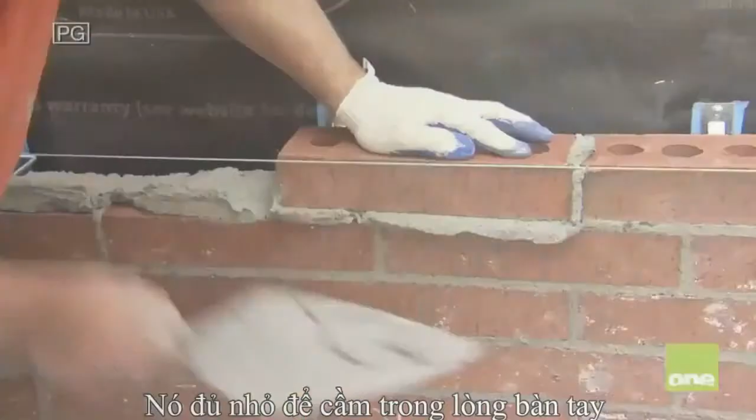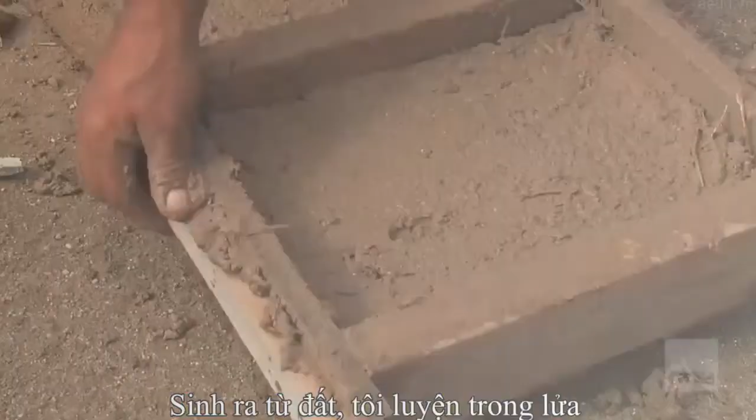Brick. It is history's first man-made building material. It's small enough to hold in your hand, but bind hundreds, thousands, or millions of them together, and these tiny blocks can capture the imagination and help build our future. Yet how this simple material is bonded together can make the difference between triumph and tragedy. From the engineering innovation behind some of our first architectural achievements to an aesthetic for the modern world, born from earth, baptized by fire. Today, new technology is adapting brick to meet the challenges of our civilization. Now, go inside the science of brick.

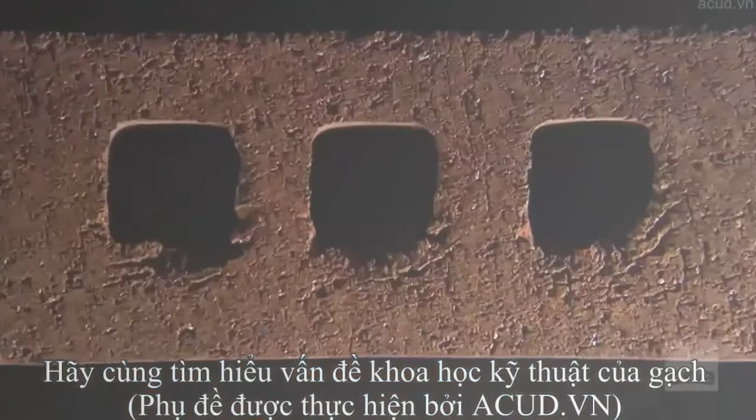It starts off as a simple block of clay. When put into fire, it turns hard like rock. This transformation has made brick a cornerstone of engineering for more than 9,000 years.

Brick is virtually everywhere. No other building material is so central to our history. It gives rise to some of the most famous structures from antiquity, many of which still stand in defiance of time.

It's mind-boggling in one respect because it's hard to realize that something can last that long. When we pick up a brick and we think of how to use it in a modern building, it is automatically linked to the history of brick architecture and the history of city making.

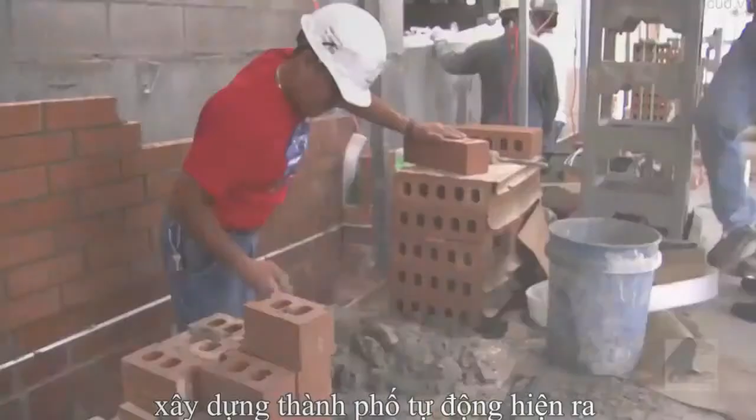Today, brick continues to meet crucial engineering needs, from the strength for everyday structures, driveways, chimneys, homes, to the exterior skin of stadiums and skyscrapers.

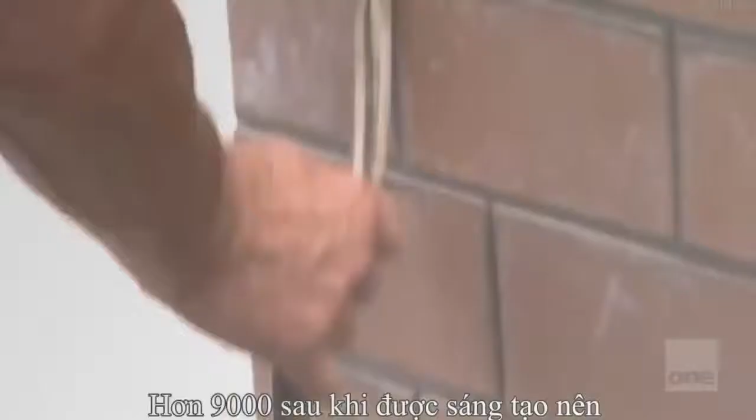More than 9,000 years after its creation, brick remains an essential material in construction. I mean, it's an incredible material, brick, and I never cease being fascinated by it. I never cease being amazed at what is done with it.

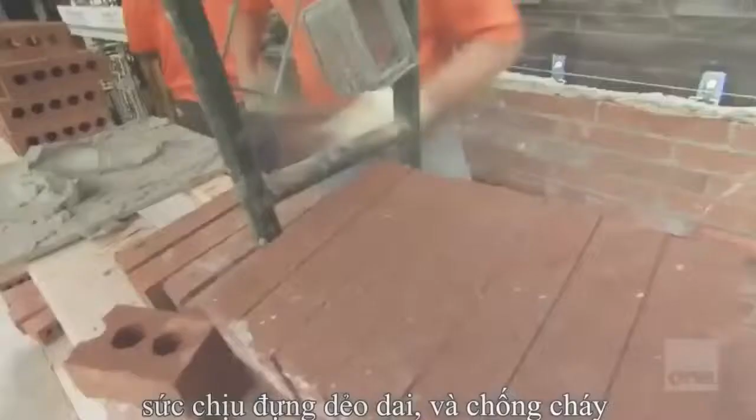Strong, resistant to the elements, virtually fireproof. Brick is prized for its attributes. But brick construction also has a central weakness: mortar.

Brick walls need an adhesive agent to bind the blocks together. Without mortar, a wall is nothing more than a collection of bricks stacked precariously on top of each other.

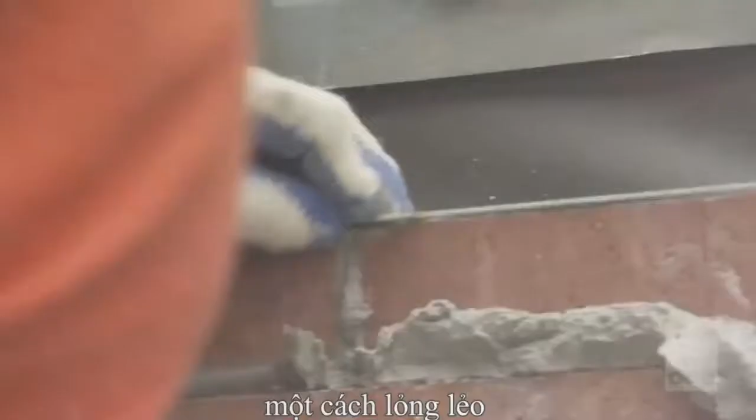Brick and mortar go together like bread and butter. You need mortar to lay bricks in because it's difficult to lay them dry and they've no ability to stick together. So one uses mortar, which is sand and cement or sand and lime, an adhesive almost, to keep the masonry units together.

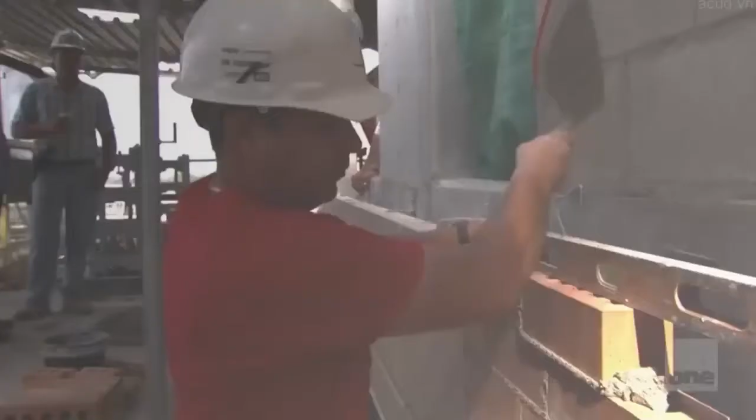Mortar is the glue that holds bricks together, but it is also brick construction's greatest weakness. When brick structures encounter a strong force from the side, the mortar goes under stress. It can begin to crack. The bond with the brick can fail.

Nowhere is this weakness more evident than in an earthquake. The swaying of the earth can cause mortar joints to fail. The results can be tragic.

Many of the brick buildings built here in the United States are not reinforced or designed to sustain seismic or earthquake loads. They don't like to be shaken around. They don't like to be moved. They don't like vibrations so much.

It's not a matter of if, but it is when. If it's a major earthquake, most engineers and architects agree that some buildings will fail in some manner.

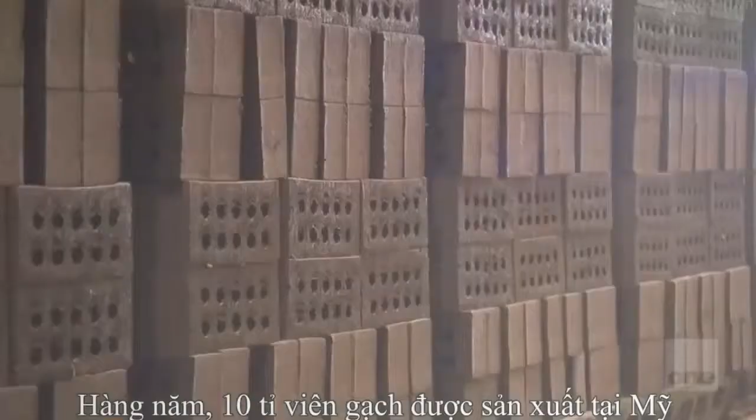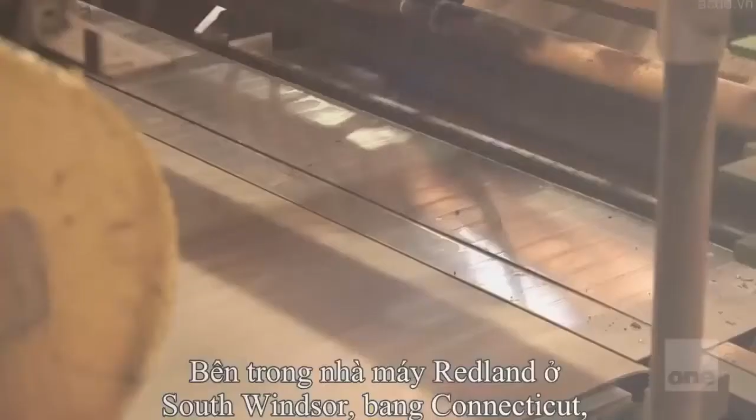Even with this inherent weakness, the demand for this ancient building block continues to grow. Each year, 10 billion bricks are produced in the United States alone. To meet the massive demand, most production is done in state-of-the-art factories. Inside plants like Redland Brick in South Windsor, Connecticut, nearly 50,000 bricks are produced each hour.

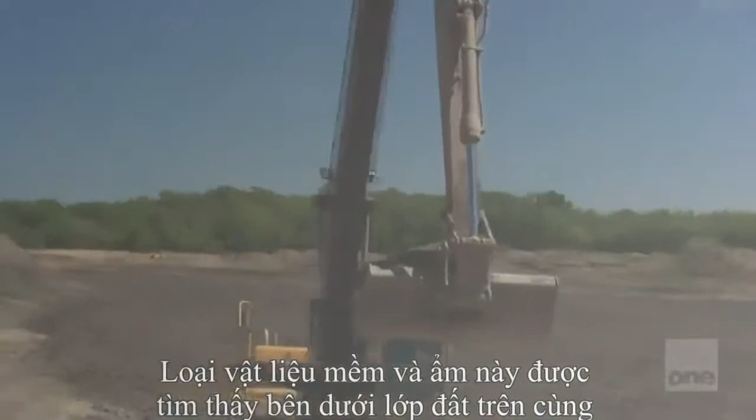While technology now drives production, the basic ingredient for creating brick has been the same for centuries: clay. Clay is the soft, wet earth generally found under the first level of topsoil. It is available in virtually every corner of the world. Clay is the same material that gives shape to pottery. But that does not mean all bricks are the same.

Select different clays that contain certain minerals, and bricks can be customized for specific traits of color, weight, or strength. The possibilities are vast.

Looking for a material that can insulate a furnace? Mine a clay that has alumina and silica for maximum resistance to heat. Need a strong material for an industrial factory floor? Select a clay with aluminosilicates for compressive strength.

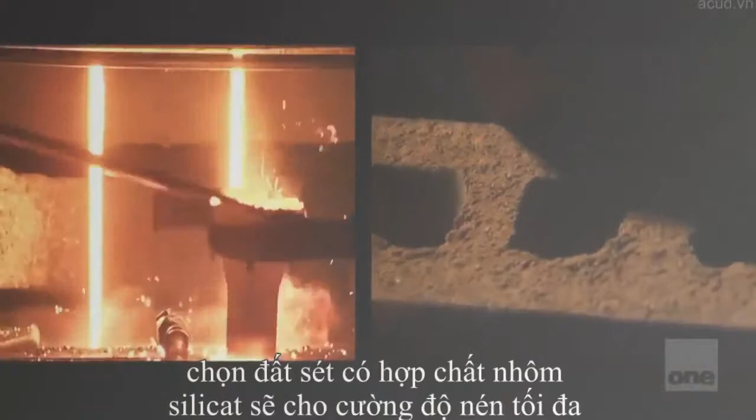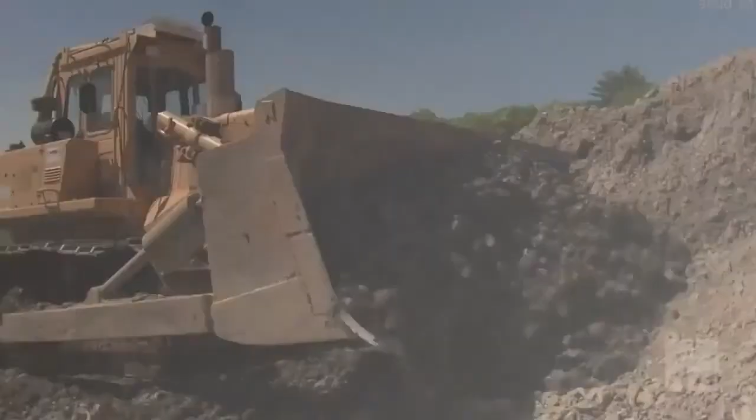Picking the right clay is a crucial step in brickmaking. Once mined from the earth, clay must be formed. For centuries, humans meticulously created bricks by hand. Today, machines called extruders shape clay.

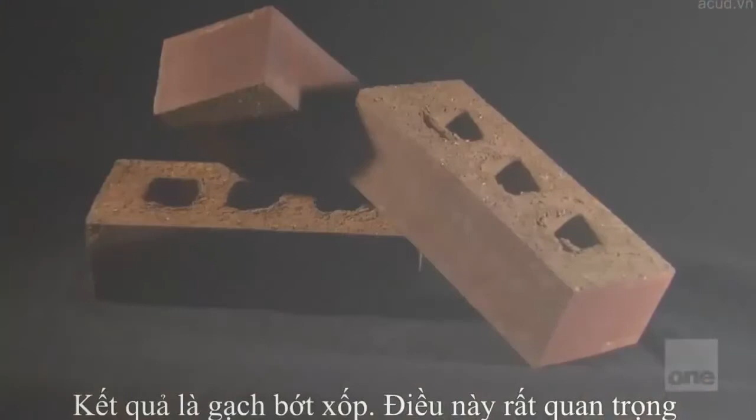As it's formed, tiny air pockets are pressed out. The result is a block that is less porous. This is crucial. In that process of actually squeezing that clay out, they actually take the air out of the brick, and that takes out the voids and makes the brick stronger and more water resistant.

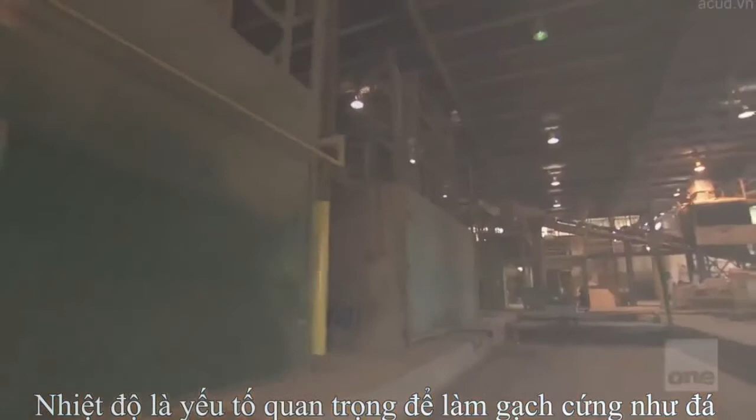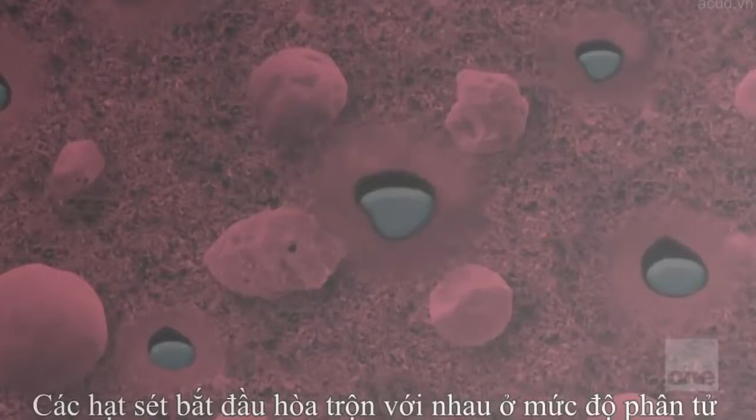But to convert clay into brick, it must be fired. Heat is the crucial element that makes it rock hard. Inside these modern kilns, bricks bake at temperatures of at least 1,600 degrees Fahrenheit. At this heat, a transformation takes place. The moisture content inside evaporates. Clay particles start to fuse on the molecular level. This bonding of particles is called vitrification. It turns soft earth into the solid, rock-hard essential building tool we call brick.

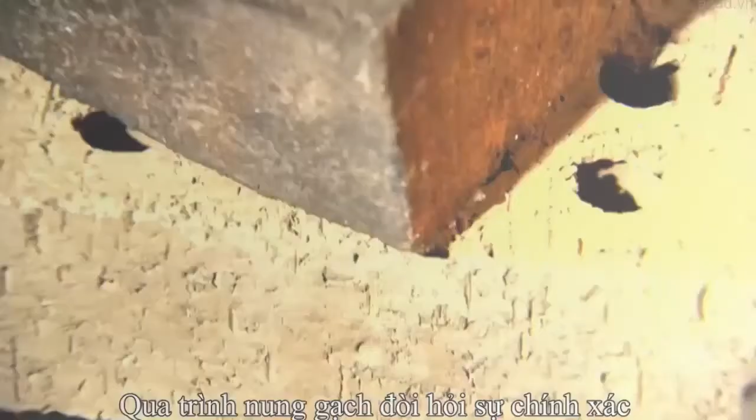Firing bricks requires precision. Bake them too hot or for too long, and the clay literally melts. Not hot enough or not long enough, and you've got a fragile, brittle block. Useless. Modern kilns monitor each variation in temperature. This attention to quality ensures that each brick will be strong, durable, and aesthetically pleasing.

Now, go back inside the science of brick. The Great Wall of China. It stretches nearly 4,000 miles. It cuts a path through the heart of a nation. And the strength behind much of this structure, an estimated 3 billion bricks.

But this epic barrier almost didn't stand at all. Centuries after it is first built, the wall begins to crumble to the ground. The mud bricks that give it strength are no match for the elements. The edges of the brick would slowly disintegrate, and then the whole thing would basically turn back into mud and go back into the earth where it came from.

To build a new wall, China needs a stronger brick. They turn to a new material, clay. Less porous than mud, clay bricks are more resistant to penetration by moisture. But sun-dried clay will not be enough. They turn to a crucial element, fire. For at least 3,000 years, the Chinese made pottery by firing it at high temperatures in kilns. They decide to employ the same technology to create brick.

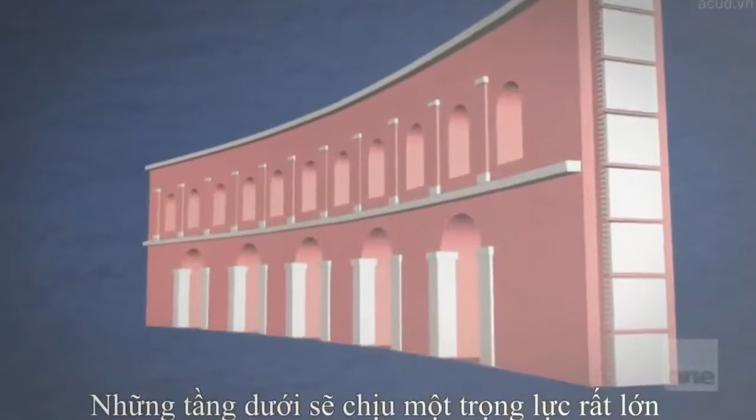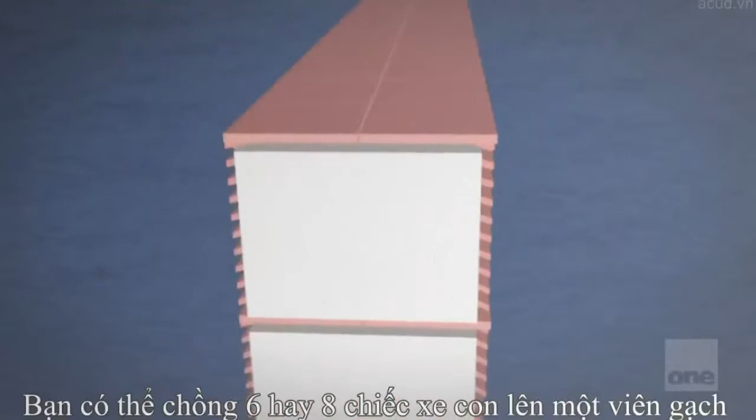The design for the market calls for a 6-story complex. This means the lower floors will bear incredible weight. In the ancient world, brick is the ideal material to support such mass. The brick strength is tremendous. You could stack brick 100, 200 feet tall. It will sustain the weight of itself. You could stack 6 or 8 cars on top of a single brick.

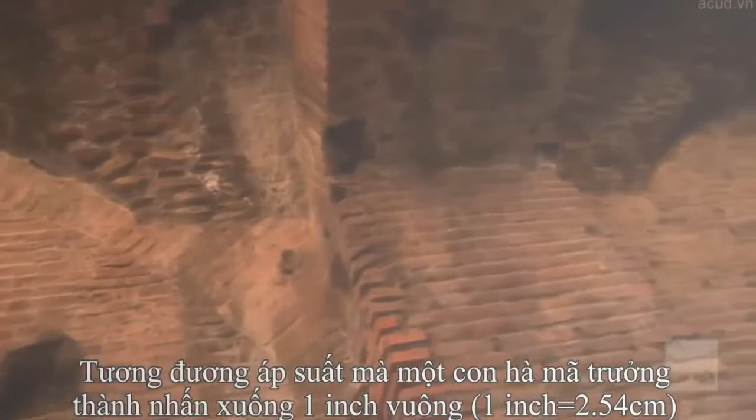It will not crush. The average Roman brick can sustain approximately 5,000 pounds of pressure per square inch. That's the equivalent of a hippopotamus pressing down on every single inch of it at once. Even modern concrete is only required to support 2,000 to 4,000 pounds per square inch.

To further increase the brick's ability to sustain the load, the Romans turned to another architectural innovation: the arch. When we think of the Romans and how they contributed to brick construction, the first thing that comes to mind is the arch. The arch is essentially a very perfect compression element. It's a very clever way to force masonry to work in compression only.

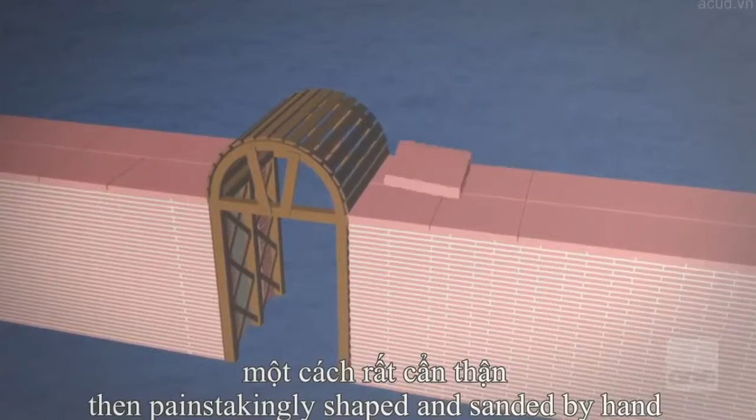To create these arches, bricks are carved into wedges, then painstakingly shaped and sanded by hand to precise measurements in order to fit securely. Nearly 2,000 years later, you can still hardly fit a playing card between the bricks. But the greatest innovation in Trajan's Market is a secret inside the walls.

Roman bricks are not the same blocks used by the Chinese. Long and square, they resemble thick tile more than anything else. By cutting these bricks like a pizza into halves, quarters, or even eighths, Romans create a formula for incredibly stable walls. The outside of the wall is straight and flat, but this is just a facade. Behind it is another material that gives it even greater strength: concrete.

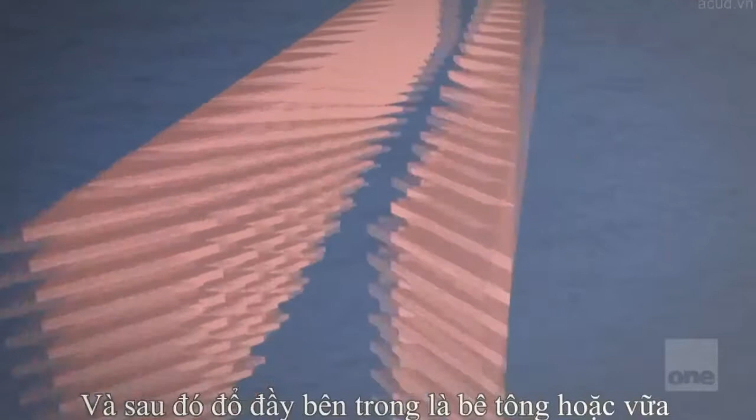They'd use this face brick, arches and stacked brick, and then they would fill the inside of the walls with concrete or grout. The jagged, sharp edges of the brick triangles bond perfectly with the concrete. So each little bit of concrete had a place to put his thumb and forefinger, so it gave it a mechanical retention as well as just an adhesive retention.

It's just good engineering. What this did, in essence, is create a composite wall, brick and concrete, and they gained more strength still. Brick's compressive strength combined with the use of concrete allows Trajan's Market to become an ancient high-rise. Now, go back inside the science of brick.

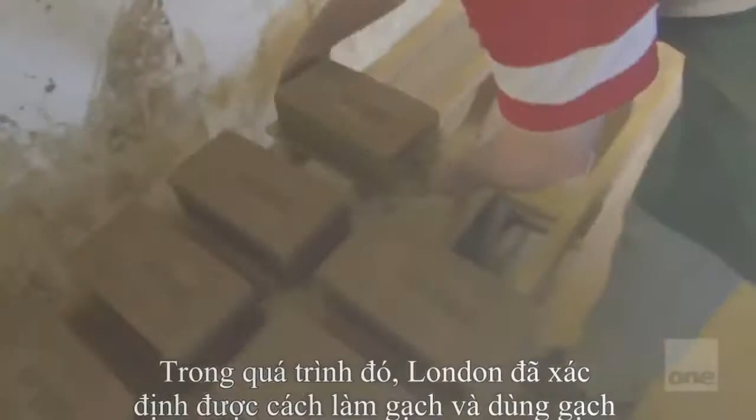London, England. This legendary city turns to brick to overcome one of the greatest disasters in its history. In the process, London redefines how this material will be made and used. September 2nd, 1666. Flames engulf London. Over 3 days, the losses are staggering. 13,000 houses, 87 churches, and countless businesses. The city lies in ashes.

As Londoners clean up the wreckage, they notice something amazing. The flames that rage through the city stop right here. This is part of the ancient city wall. It is made of brick, and it is entirely unharmed by the flames. In fact, seemingly every time the fire reaches a brick wall, it stops in its tracks. The reason? Brick is fireproof.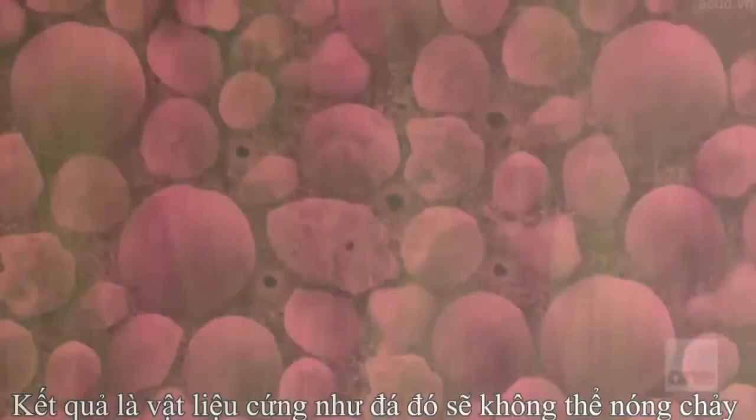When clay is fired in a kiln, the particles inside fuse together into a new molecular structure. The result is a rock-hard substance that will not melt unless it is pushed to more than 2,000 degrees. In essence, brick is virtually immune to typical fires. It's already been fired in a furnace for days before you ever get to use it.

So its properties were actually gained by its thermal sintering of the components together. And so you come along and heat it back up to the kind of temperatures of a kiln, which would not be uncommon in a fire. It sort of says, oh, back in the kiln.

In the wake of the London fire, Christopher Wren, the chief builder to the king, imposes new regulations on all reconstruction. Every new building must be made from fireproof materials. London turns to brick. People wanted to use fireproof products that could withstand any kind of catastrophe that would come around. But the city also needs to build quickly.

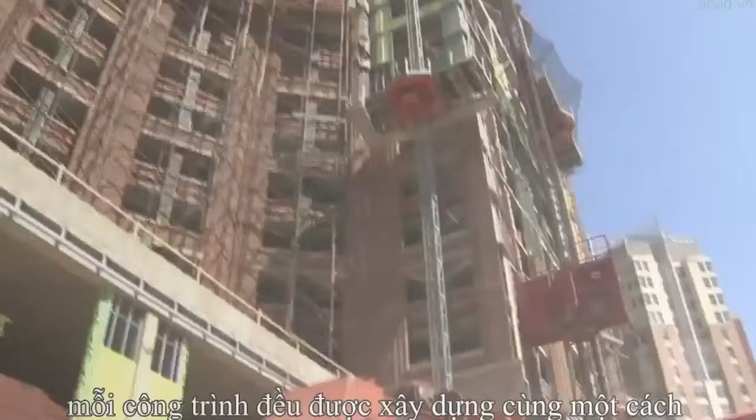Brick construction is incredibly time-consuming. From the earliest brick structures up to the modern day, each building has gone up the same way. Brick by brick, each one painstakingly laid by hand.

Typical square blocks make progress even slower. There's beauty in the shape of the brick, which comes from a supreme economy. Some of the early bricks would typically be square, but square brick isn't terribly efficient. London looks to a different shape of brick, rectangular. Able to fit in a human hand, these rectangular blocks permit masons to raise structures quickly and efficiently.

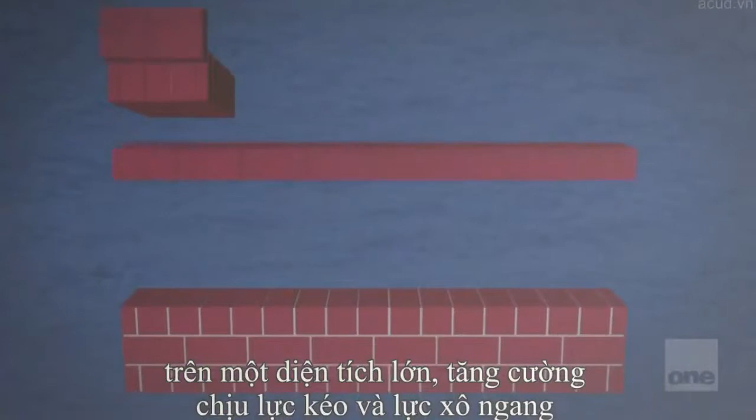This shape also brings an added benefit, strength. The rectangular shape allows one brick to lay directly across two bricks below it that are facing in another direction. This stacking system gives walls strong patterns that distribute weight over a larger area, increasing both compressive and lateral strength. From churches to hospitals to private homes, brick restores London to a great world capital.

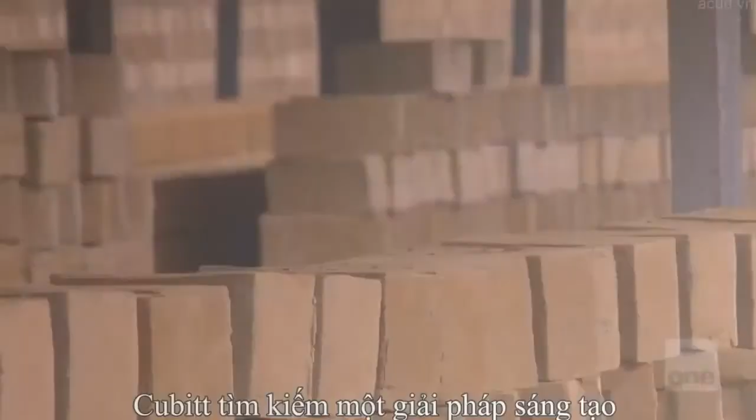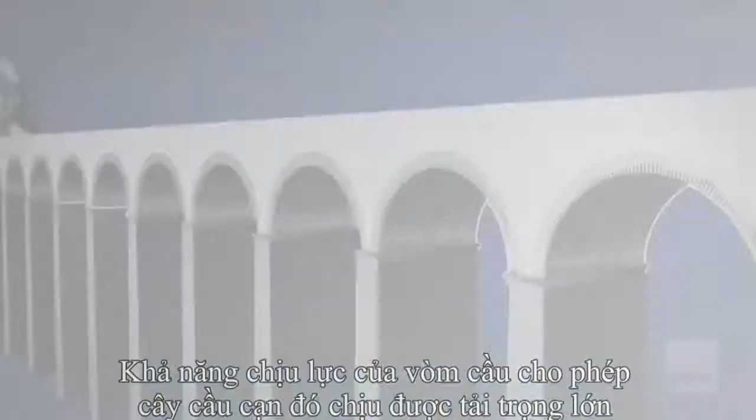England, mid-1840s. Renowned engineer William Cubitt sets out to run a rail line from London north to Edinburgh. In the way is an enormous obstacle, the Mimram Valley. Cubitt looks to an engineering masterpiece for inspiration. He elects to use 40 massive arches modeled directly after the Roman aqueducts to span the distance. The strength of the arches will permit the viaduct to carry great weight with fewer bricks for construction.

After just 2 years of construction, the viaduct opens in 1850. It quickly begins to buckle under the train traffic. As the use of brick developed and major cities wanted to use it for projects like viaducts and bridges, they discovered that brick has its weaknesses. They don't like to be shaken around. They don't like to be moved. They don't like vibrations so much. In essence, each train is like a mini earthquake, slowly shaking the bricks side to side, causing them to crack. Engineers need a new solution.

The answer lies in a completely different kind of brick, engineering or pressed brick. All bricks have tiny pores or air pockets that can act as weak spots when they encounter force. Engineering brick is made by mechanically pressing the clay to be less porous, increasing strength. Well, engineering bricks came about largely because of the railways, where there was a need for a brick with compressive strength. In 1930, engineering brick is used to reface the entire viaduct. More than 150 years after it's first erected, Digswell continues to provide safe passage between London and Edinburgh.

Now, go back inside the science of brick. It stretches half a city block. It stands nearly 200 feet tall and is composed of almost 600,000 bricks. The Monadnock Building in Chicago is a landmark in American architecture. When it opens in 1892, the Monadnock is hailed as a marvel of engineering. Today, it represents something very special in the history of brick, its downfall. The Monadnock is the last all-brick high-rise in the world.

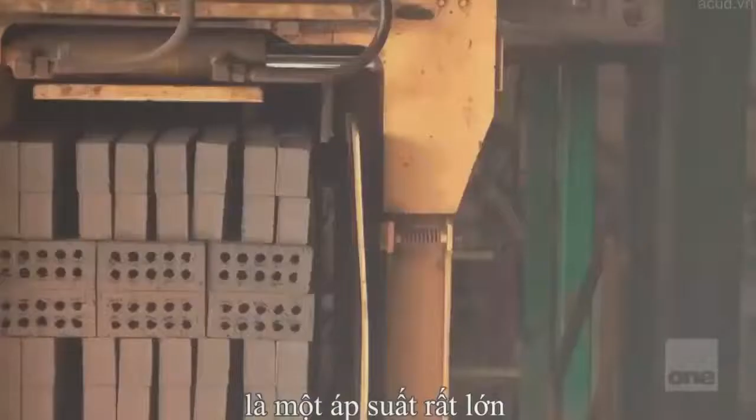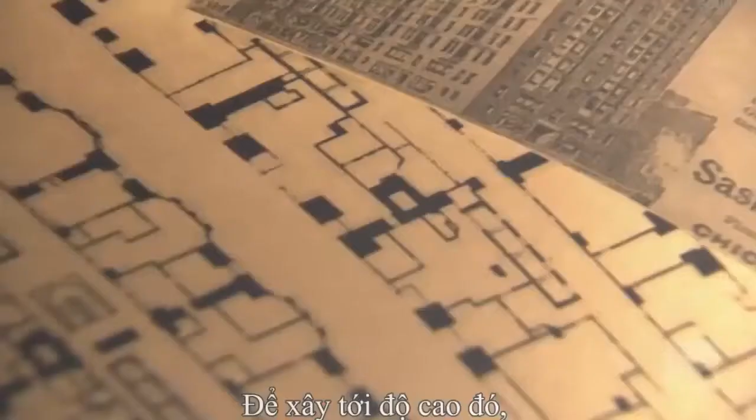1889. Architects Daniel Burnham and John Wellborn Root plan to build the tallest brick office building on the planet. The Monadnock will stretch 16 stories above the heart of Chicago. To erect a building to such heights, engineers need to conquer a crucial problem: brick's lack of lateral strength. When a brick wall encounters stress from the side, the mortar holding it together can fail. Some engineers at the time believed that any brick building over 10 stories will get knocked over in a strong wind. How will the Monadnock combat the legendary Chicago winds at 16 stories?

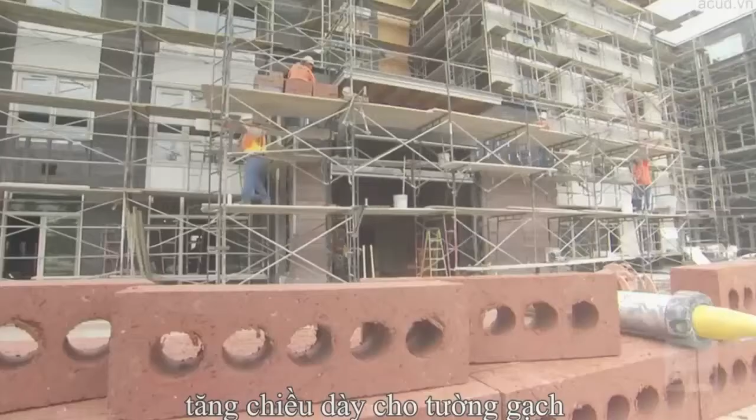The answer seems simple. Add thickness to the walls. Walls in an average brick building are usually 1 to 2 feet thick. For the Monadnock, engineers triple that to 6 feet thick on the ground floor. But the apparent solution creates a tremendous problem. The completed Monadnock weighs an estimated 50,000 tons. The building is so heavy, it begins to sink. The Monadnock is designed to showcase brick's potential for high-rise construction. Instead, it highlights the material's limitations.

Just 2 years after the Monadnock opens, an addition is made. Another massive building stretching half a city block. The new structure seems identical to the original, but beneath the brick is a secret: a steel frame.

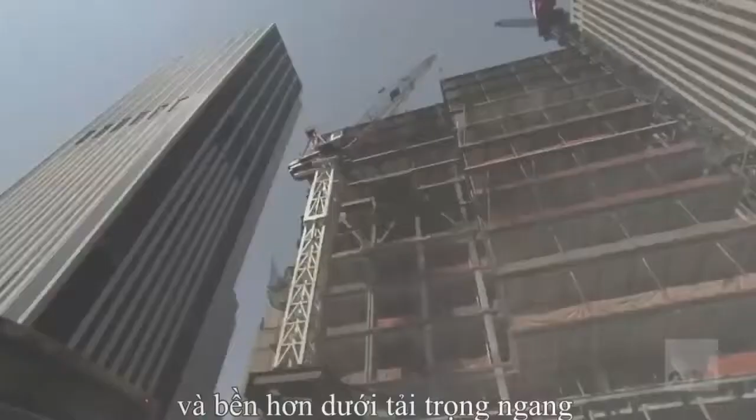In the 19th century, the mass production of steel emerges and changes the face of construction. Lightweight, flexible, and strong under lateral stress, steel is seemingly everything brick isn't. Steel permits the frame of the addition to be much thinner and lighter than the walls of the original.

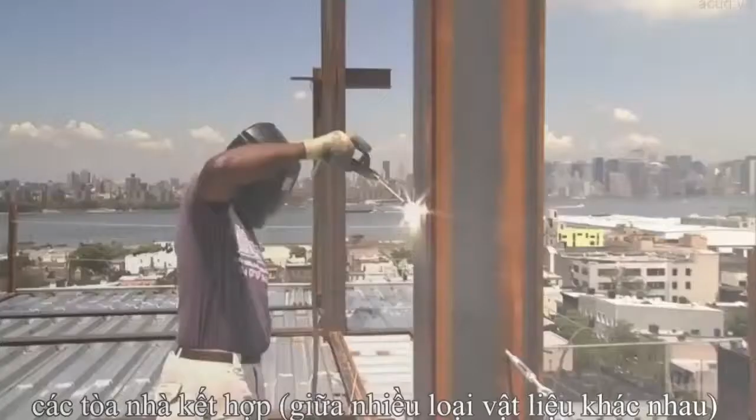The addition to the Monadnock represents a new chapter in brick construction: composite buildings. Steel gives architects a new tool to build higher, stronger, and faster. As buildings soar ever higher, brick takes on a new purpose: aesthetic beauty. It is really, really, really thick paint that lasts a long time. And because of its traditional look, there's a great many people who prefer the aesthetics of the brick.

The Chrysler Building, with its wonderful Art Deco top in New York, is clad in 3 million blue-glazed bricks. So brick ceases to be used as a structural material, but it retains great importance as a decorative cladding. Before, we used brick as the load-bearing element, and there was something covering it, and brick was the sort of utility part of it. Nowadays, though, brick is now the aesthetic part, and behind the brick is some type of steel or concrete frame, which is taking all the load.

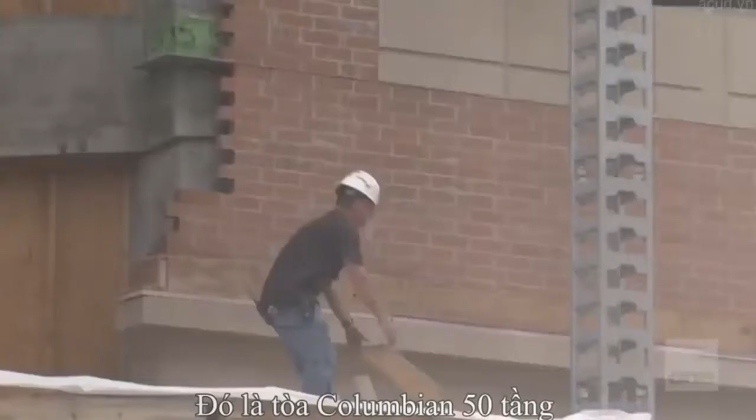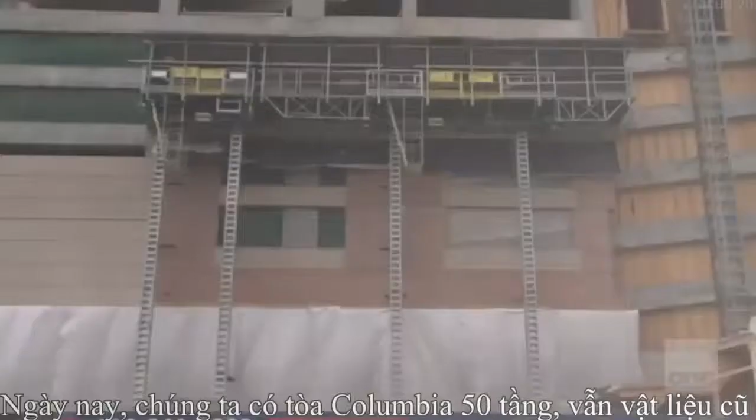Back in the turn of the century, when they were building the Monadnock building and other buildings like that, architects and builders were limited to how high they could build the masonry. Today, we've got the Columbian, it's 50 stories high. Same material, brick, on the outside. And while a lot of the construction has changed and a lot of the design aesthetic has changed over the years, brick absolutely has a timeless quality about it.

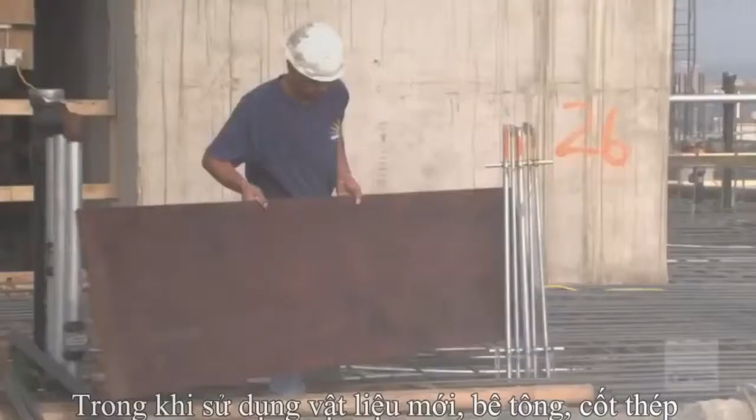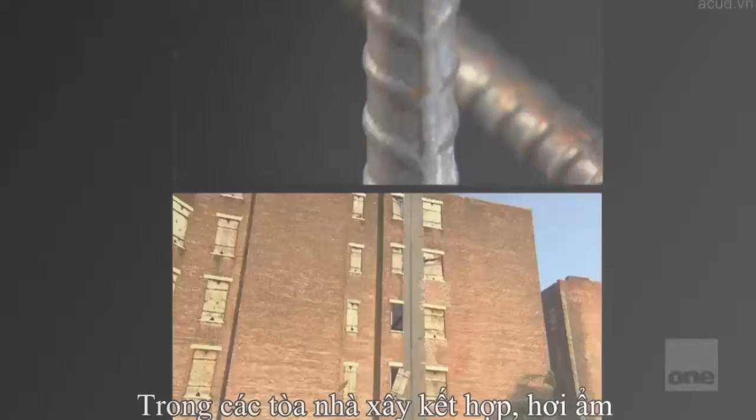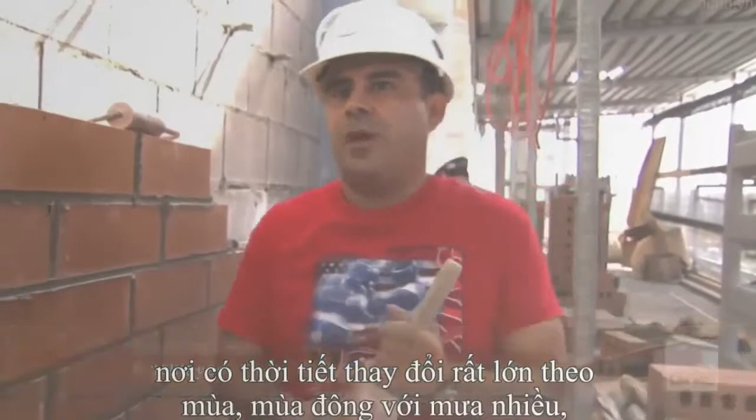While using the modern materials of steel and concrete allows engineers to build stronger and faster, modern composite buildings bring new challenges. In composite buildings, moisture can collect between the internal structural walls of concrete and steel and the brick exterior. The result can be corrosion and decay at the core of the building. Eliminating that moisture is crucial. We need a drainage system for these walls, considering that we're in the northern part of Illinois where the weather changes dramatically from winter to rain, and then we have the real hot summers and the fall and the moisture.

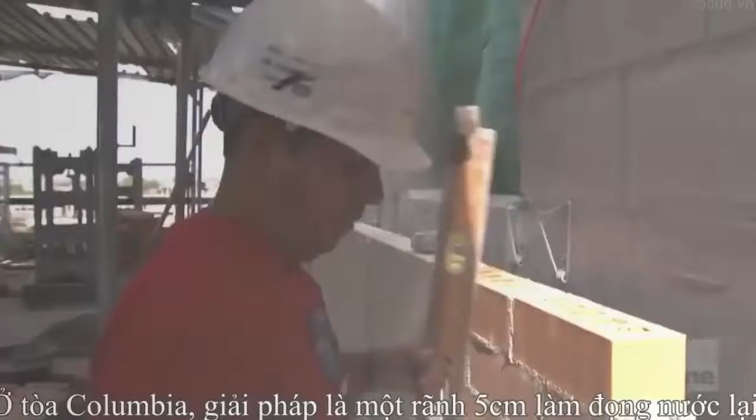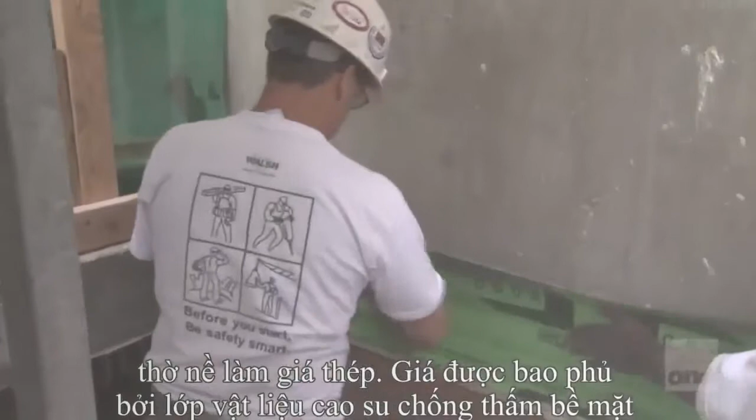In the Columbia, the solution is a 2-inch cavity wall that collects the water and drains it away from the building. The technique bricklayers use to make this happen is an intricate one. Before starting a row of bricks, the mason sets down a steel shelf that is covered with a rubberized waterproofing surface. He places a piece of rope in the mortar between bricks. This will act as the wick to carry the water away from the interior wall. The water will be safely carried outside the building, where it can't do any damage.

Composite buildings permit brick to soar higher than ever before. No longer bearing the structural load, it is the beauty of brick that allows it to survive in the world of modern construction. Now, go back inside the science of brick.

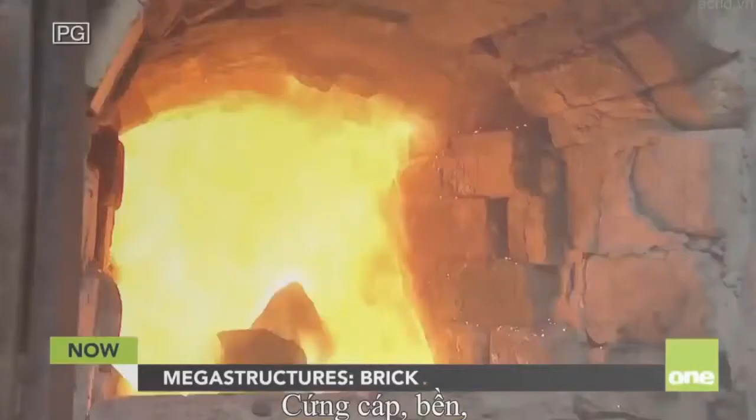Strong, durable, virtually fireproof. Bricks have been a cornerstone of engineering for nearly 10,000 years. But when brick construction goes bad, the results can be deadly. As brick construction ages, the mortar that binds the bricks together can wash away. Without regular maintenance, once solid brick walls can become death traps.

Today, they are on their way to inspect an aging and abandoned group of apartment buildings in Harlem, which are in danger of collapse. Harlem has some of the most beautiful housing stock in the city, much of it more than 100 years old and carefully restored. But some buildings have missed out on Harlem's recent boom. Today, the forensic team is evaluating the safety conditions of a group of apartment blocks built in the 1890s.

They have been abandoned by their owners and now belong to the city's Department of Housing, which must evaluate if the brick structures can be saved or must be torn down. You notice some bricks are missing. It's very deteriorated. When the forensic unit gets a call to go in to have a look at a building, we know that the structural deterioration is advanced. We've lost floors, we've had fires, partial wall collapses. So what we're going in to do is to evaluate to make sure that it's safe.

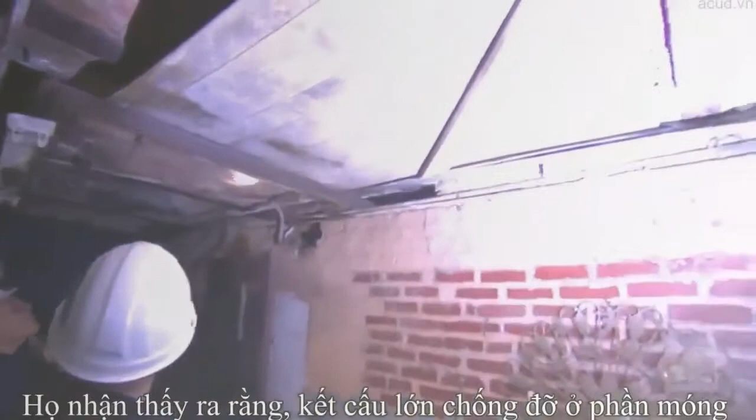The brick arches are in good condition. They discover that the huge structure is supported on a base of brick arches. How is the mortar here? It's okay. It's stable. It's drying. Amazingly, the 120-year-old masonry is holding firm. It is the steel-reinforced beams that show the most decay. No, the steel here is flaking on the... To do a complete rehab, these aging metal beams must be reinforced or replaced.

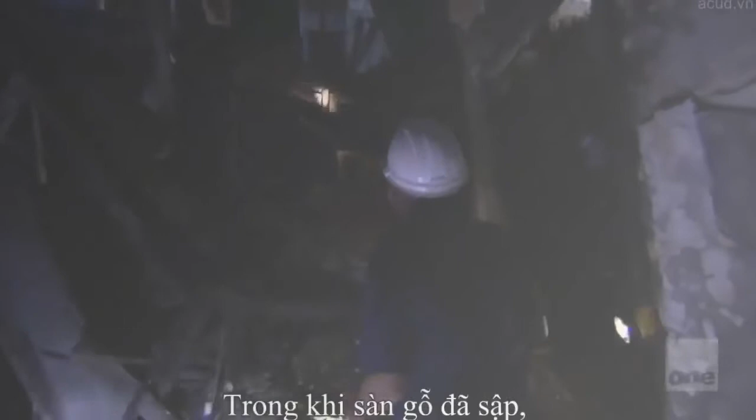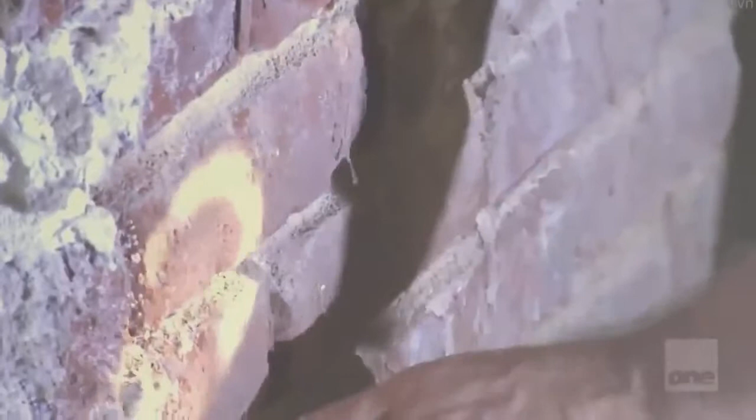Very careful, of course. Visiting the upper part of the building poses a special risk from ceiling collapse. Step. Any misstep here could be deadly. Second floor joists are collapsed in this area right above us. While the wooden interior floors have collapsed, the building's brick walls remain solid. And the wall seems pretty acceptable from the interior, but crucial mortar shows signs of decay. The mortar is just, you can remove it with a finger. To make this building habitable once again, these gaps must be repaired.

The team's evaluation today is that the buildings are a hazard, but their brick frames essentially sound. The final decision to restore or rebuild can now be made by city officials. I believe the buildings can be brought back relatively easily. It's commonly done. We have one right here behind us. We have the original version of the building which has been restored, and right beside it we have a 100-year-old neglected, abandoned 6-story walk-up.

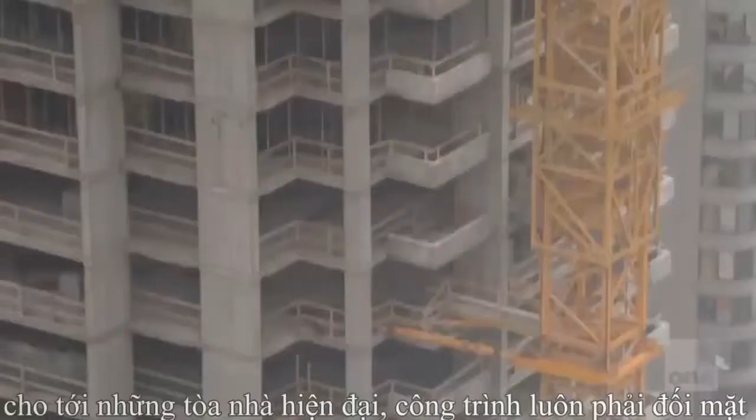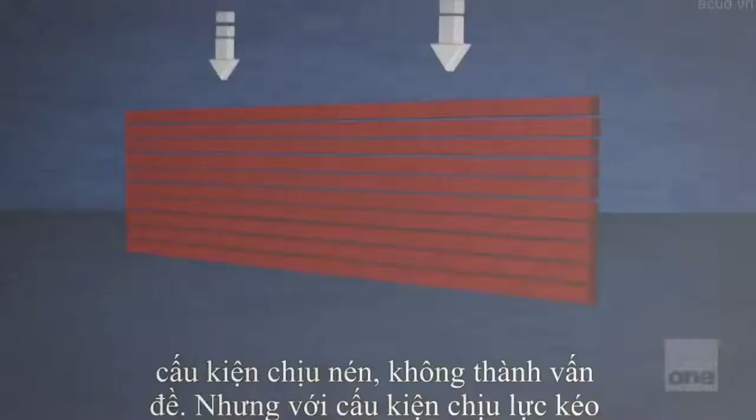But from the earliest brick construction up to modern buildings, these structures have all faced a lethal enemy. Earthquakes. When the earth starts to buckle, bricks' inability to move from side to side with the quake can bring them tumbling down. And when the ground shakes and a building tries to follow the ground, some parts of the building go into tension and some go into compression. The parts that go into compression, not a problem. But the parts that go into tension, really bad news. Now, go back inside the science of brick.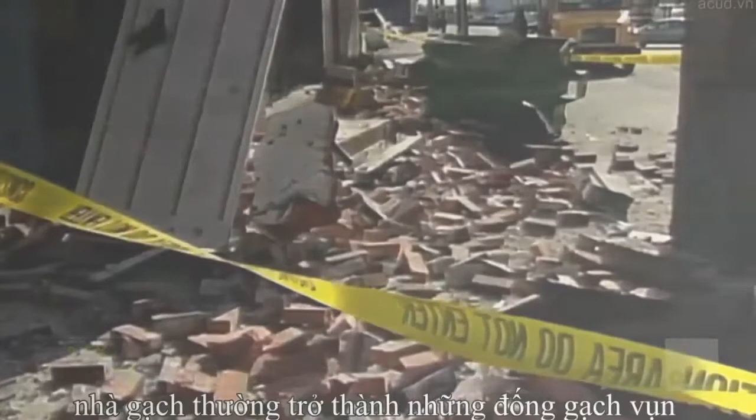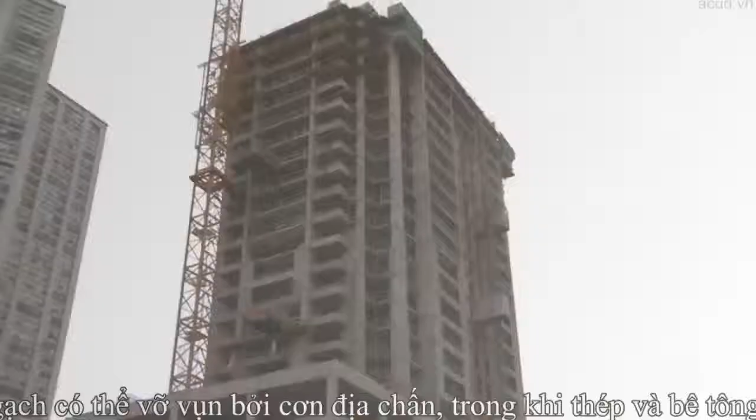From San Francisco to Los Angeles, to Iran, to the Philippines, the picture repeats itself. In the aftermath of a seismic event, brick buildings are often reduced to piles of rubble. A primary victim of earthquakes are buildings with traditional brick construction. With no steel or other reinforcement, their structural stability can fail with a strong enough force. And even in modern composite buildings, bricks can crumble in an earthquake. While steel and concrete keep the core of the structure intact, the brick facing falls away.

The reason for the failure is simple: mortar. Mortar is brick's Achilles heel. When a brick wall encounters a violent lateral force, the mortar holding the bricks together starts to crack. If the force is strong enough, the mortar separates from the brick and the wall comes apart. Not only will you see piles of brick on the ground after an earthquake in news footage, but you'll see half the bricks look like they could be sold in the garden store tomorrow. There's not even any mortar sticking to them. They're just bare bricks sitting there. For decades, engineers have been seeking to solve the weakness of mortar joints.

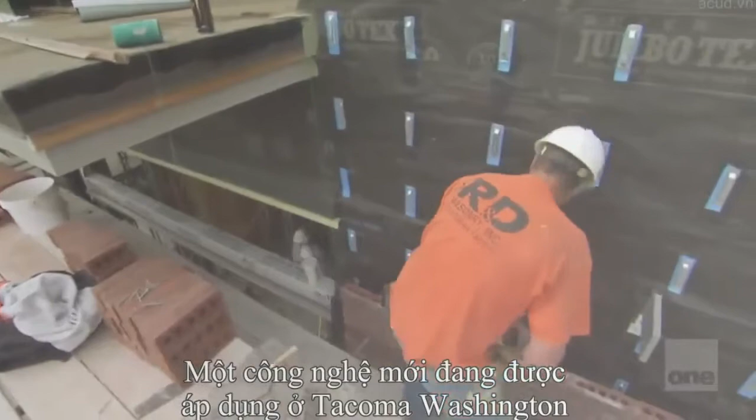A new technology is currently being employed in Tacoma, Washington. When completed, this 6-story building will provide apartments to faculty and students at the University of Washington. Erected with a central core of steel and concrete, the building will be faced with more than 10,000 bricks.

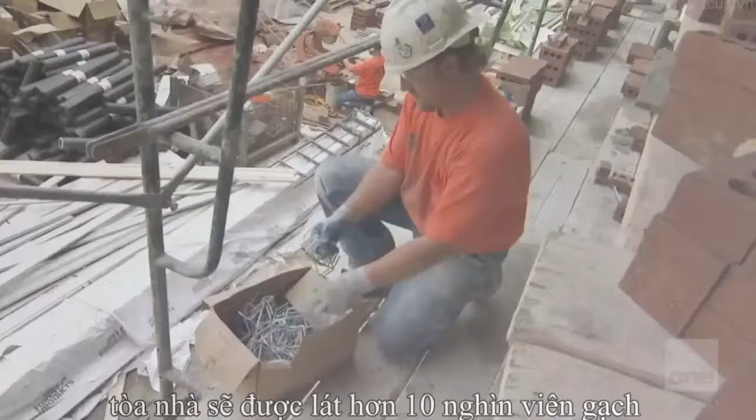To secure them to the building, engineers are using a new invention: the seismic tie. Made of steel, the ties literally attach the bricks to the interior concrete and steel structure of the building.

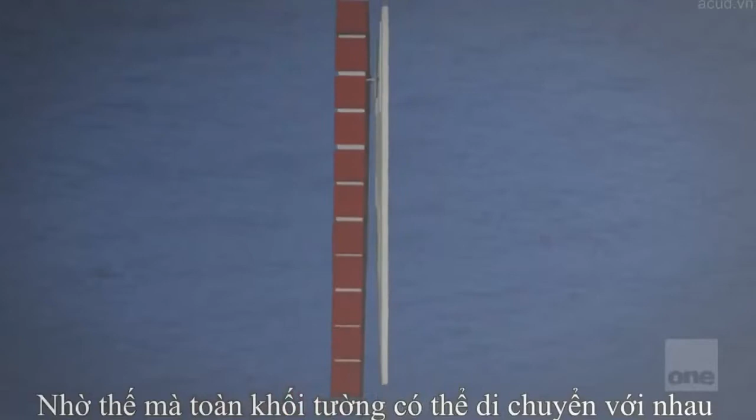The ties we're using are attached like this, and then the 9-gauge wire nestles into it, which allows the building to move different from the masonry. The masonry can shift up and down this much compared to the backup of the building and still be attached to the building. The ties permit the brick walls to move independently of the primary building during a seismic event, but still remain attached. Thus, the mortar and bricks are able to move in unison, eliminating the tension that causes them to break under force.

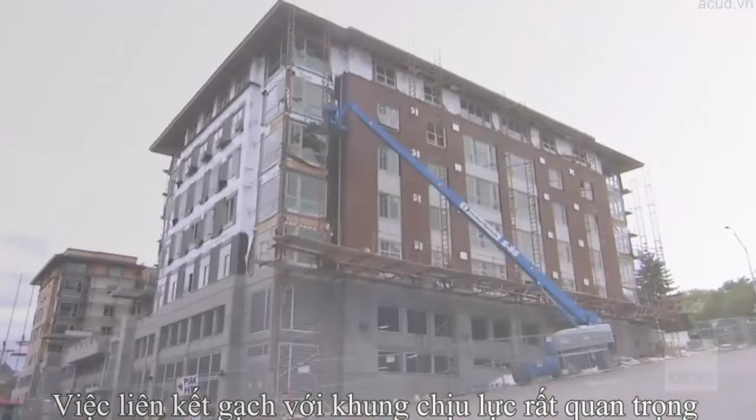Securing the brick to the structure of this building is crucial. Tacoma and nearby Seattle sit directly on a fault line. February 28, 2001, 10:54 a.m. The Seattle region experiences a shock registering a magnitude of 6.8.

Many of Seattle's landmark brick structures suffer severe damage. Brick mason Jim Reynolds is working on a construction site when the quake hits, but it's one equipped with seismic ties. The new buildings we were working on had masonry veneer. Because of the seismic attachment, the brick just undulated with the wave-like motion of the earthquake.

The seismic tie has great potential for new construction. But what about existing brick structures? There are countless brick buildings in earthquake zones all across the country. But if reinforcement isn't done, many of these buildings are little more than sitting ducks. If we fool around with structures that we know are seismic liabilities and wait long enough, nature will take care of the problem for us.

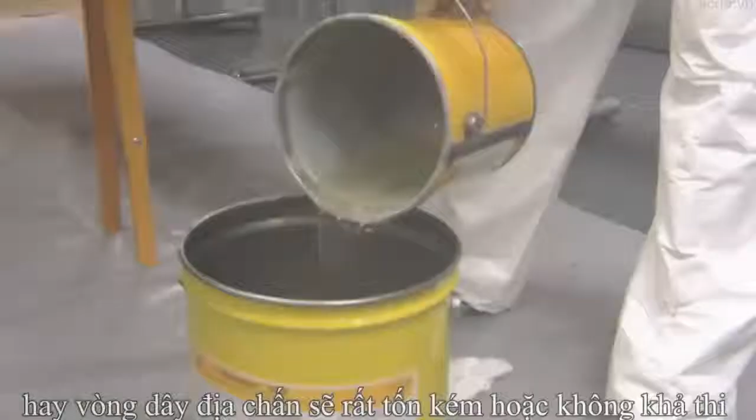In many instances, adding steel or concrete or installing seismic ties is costly or impossible. But a new technology is attempting to solve the problem by reinforcing brick from the outside. It's a space-age fiberglass fabric with 5 times the strength of steel.

This fabric can permanently bond to brick with a special epoxy. The fabric is designed to help a brick wall survive the force of an earthquake. You're combining the positive attributes of a brick wall, which are very good in compression, with the positive attributes of the composites, which are very good in tension.

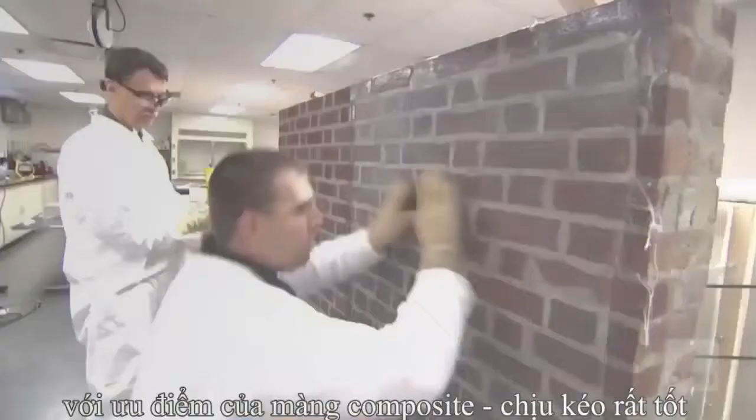A properly adhered and bound building won't drop its brick on bystanders in a seismic event. You still preserve the brick. The epoxy reinforcement is very strong.

In this test, the sledgehammer simulates the same type of violent force a brick wall encounters in an earthquake. When the sledgehammer strikes the side of the wall that has not been treated with the fabric, it crumbles. Strike after strike, the mortar and bricks fail. Brick by brick, the wall collapses.

On the side of the wall treated with the fabric, the results are incredibly different. With each strike, the fabric disperses the force. The bricks and mortar are held securely in place. This fabric has incredible potential. It could provide greater support and safety for countless unreinforced brick buildings around the world.

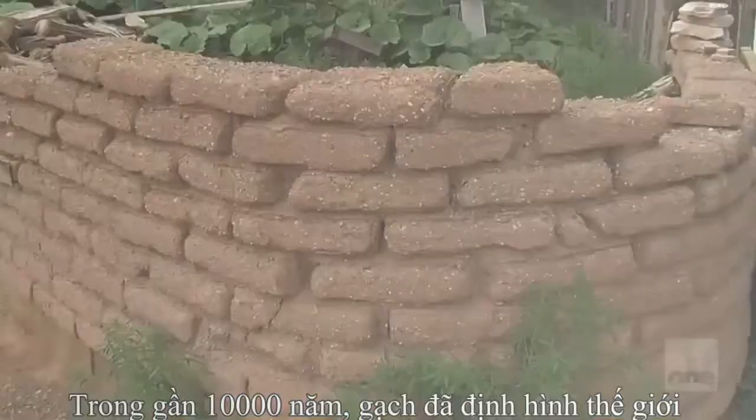For nearly 10,000 years, brick has given shape to our world. From simple blocks of mud, to composite buildings, to space-age technology, human ingenuity continues to reinvent brick, keeping this ancient creation on the cutting edge of modern construction.

But this material's greatest attribute may be our long connection to it. I think brick has a unique quality. We almost sense in our bones its history. It's a material that we just understand. It makes us feel good. When buildings are made out of brick, we feel good. It's an incredibly aesthetic and beautiful material.

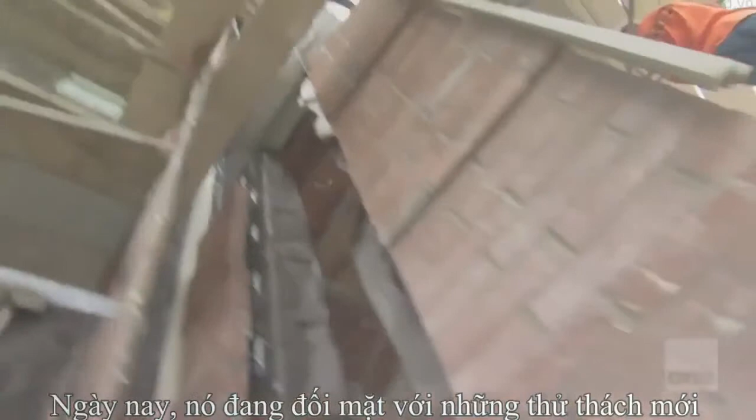People are comfortable with it. They like to see it. They like to look at their building and feel like it's strong. It's a process of the earth, and we understand it returns to the earth. So it's one of these materials that just makes sense. If brick is anything, it is a material that continues to adapt. Today, it is responding to the emerging challenges of our world, and it's helping to lay the foundation for our future.